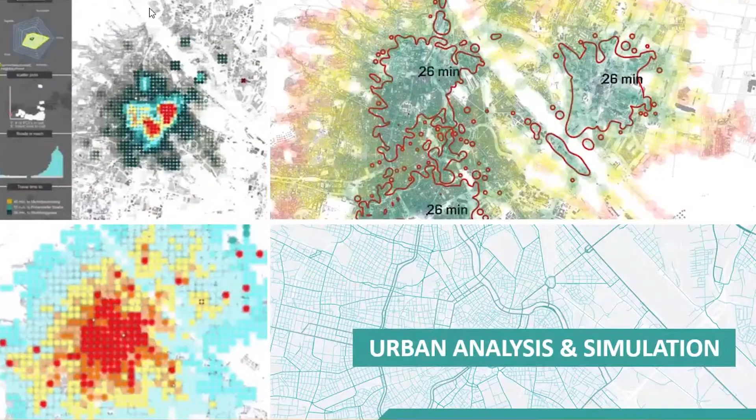Urban transformation and resilience. And that includes, of course, smart cities and energy and resource management and water management and waste management and all of these things, preparing for what's inevitably coming. So climate change and urban resilience and how you react to all that. And going into more of the part that the lab is working on, urban analysis and simulation, a lot of work on how do we analyze cities and simulate conditions and understand cities better. And of course, computational urban planning, so there's a generative side of things.

The lab itself is built as an idea of an interactive interface for the simulation and the modeling and the computational urban planning. So it's got a lot of interactive interfaces and mixed reality and AR, VR components. And this is how it looks when we're pretending to be working on something and people take pictures. This is how the City Intelligence Lab looks. There's augmented reality models and there's interactive screens and stuff like that. This is a little bit how it is.

If you ever come to Austria or Vienna, please feel free to come and visit us. It's great to always have guests and show them around, because actually it's an interesting space. Right now, we don't allow anybody in because everybody is potentially going to kill us. So we don't allow people. But once we get vaccinated, we will be happy to get you.

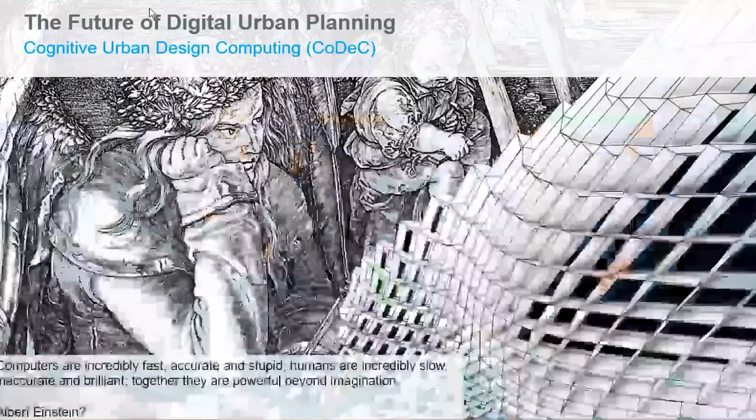Anyway, so a little bit about this project that I was talking about. So the City Intelligence Lab is also very closely related to the Cognitive Urban Design Computing, or CODEC project, which is essentially an internally funded AIT project that funds the research of a few PhDs and a few master's students in order to advance computational urban planning. And most of the work that you see and you will see is part of CODEC. And CODEC is also led by Reinhard König, professor, Bauhaus University in Weimar. So we're together working on the lab and the CODEC project. I'm the deputy on CODEC and the head of the lab. So enough with that, and let's go to the actual interesting stuff.

Who knows what this is from the audience? And please speak up if you do. I hope at least someone knows what this is. Pavlo, I was waiting for you to say something. No? Anyway. "I'm here, man, but I don't know what it is." This is GenerativeComponents. This is GC. The first GC. This is the beautiful GC. "I thought you meant a project." No. GC. Okay, GC, and that was 15 years ago, roughly, right?

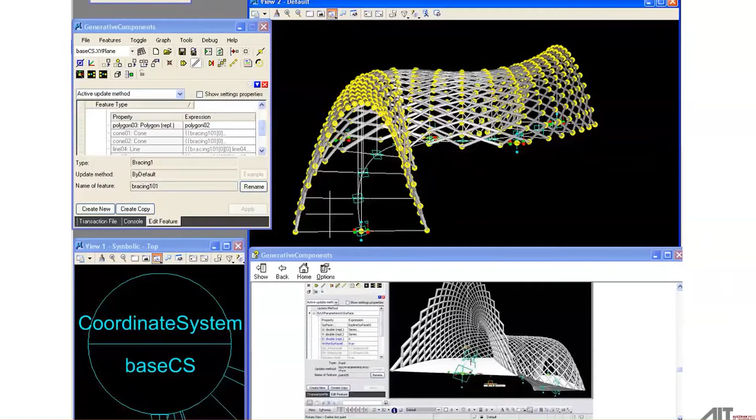And so that was how horrible computational design was 15 years ago. But also, it was a kind of revolution. This is when I started getting involved in computational design. It was essentially learning GC. It was a really weird system that was within MicroStation, and you could just connect things. The same thing that you do essentially with Grasshopper today, but it was very, very crude and crashing all the time. 15 years forward, you have the kind of spaghetti that you probably have cooked very often during this course, which is what we have today, right?

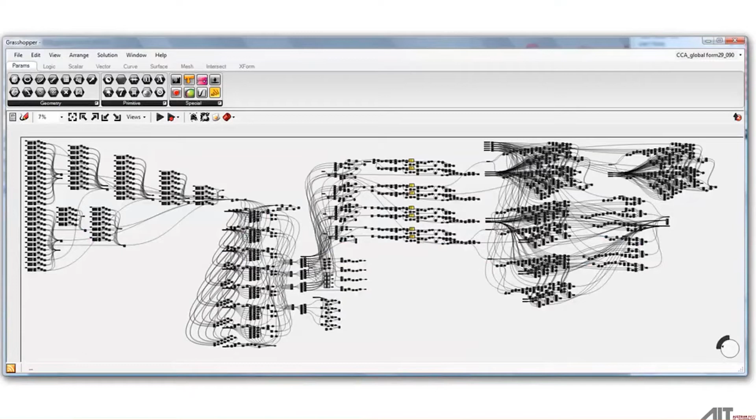So we've gone a really long way in these 15 years. We've actually progressed quite a lot on what we can do with computational design. And this is probably something which is a little bit more niche than that. If we go again 15 years back, let's say we have all this ability to create geometry and generate design, which is parametric or associative or whatever you call it.

But in order to connect that to performance, to actually understand how well these designs perform, this was really, really difficult 15 years ago. This is a connection of GC to Ecotect, which was a very weird connection. You had to download DLLs and run weird things on your computer to get a solar radiation analysis shown on your GC definition. It was not a definition, but it doesn't matter, on your GC geometry, right? And that was like a really big project and breakthrough.

And today, of course, you go into Food4Rhino and you download 20 different plugins, and you can do all sorts of things from FEA analysis to particle spring systems to CFD, right? So we've really progressed in terms of performance feedback in design. We've made huge progress. So when we're talking about urban planning, we can actually have a much more intelligent workflow. We can integrate into the planning process all sorts of different KPIs and performance metrics, whether economic, climate or resources connected, right?

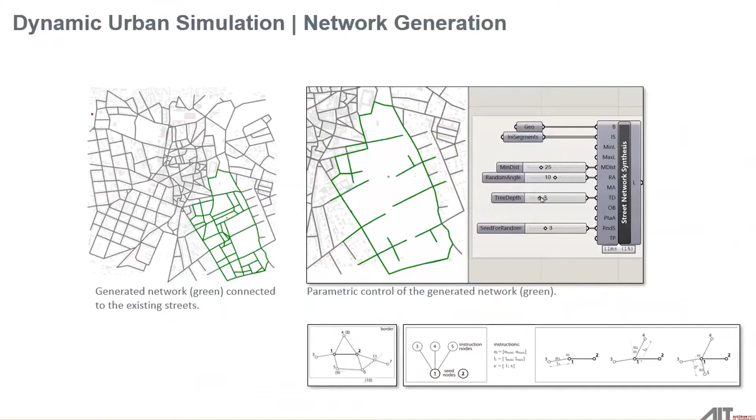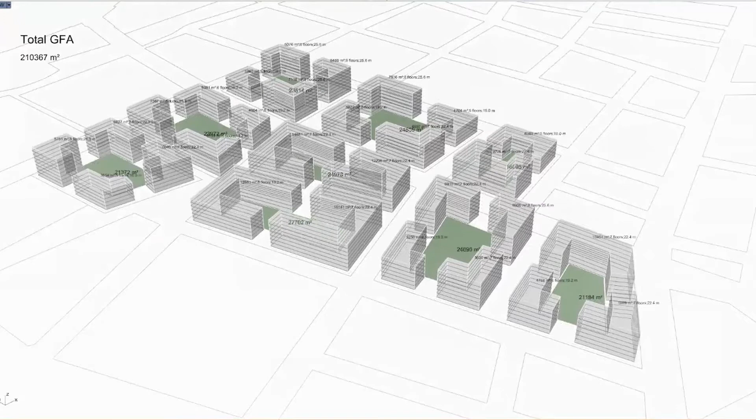It's a very interesting toolbox, and if you don't know it, you can have a look, because it makes space syntax metrics and other similar tools available. So you can find shortest paths, create centrality graphs, or measure the typical spatial metrics of space syntax. You can also generate things like streets. In this case, you see how you can generate a street network from a plot. And you can generate whole typologies and building blocks very quickly. So that gives you the ability not really to design iteratively, but to generate solutions very fast.

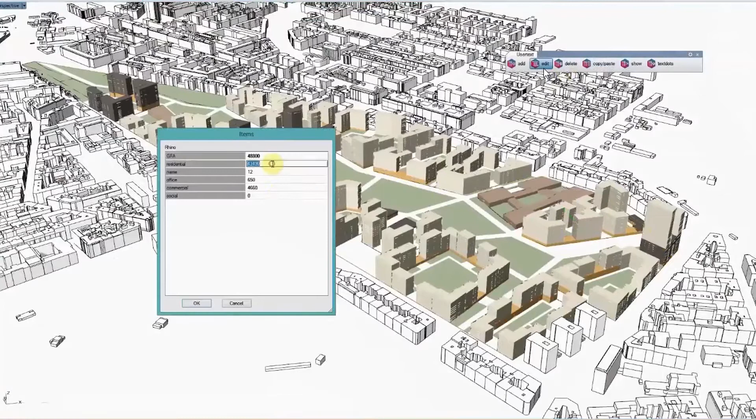I'm sure you have seen things like that before. It's not really that new, of course. For urban planning, this process is relatively new, because it has not been adopted as much as in building design. Here you can see you can build a whole neighborhood, change program and very quickly adapt, and that is already a step up. We're doing more things than that in the lab. I'm just going through several things we're doing, but also giving you an overview of how we can think of the computational urban planning process.

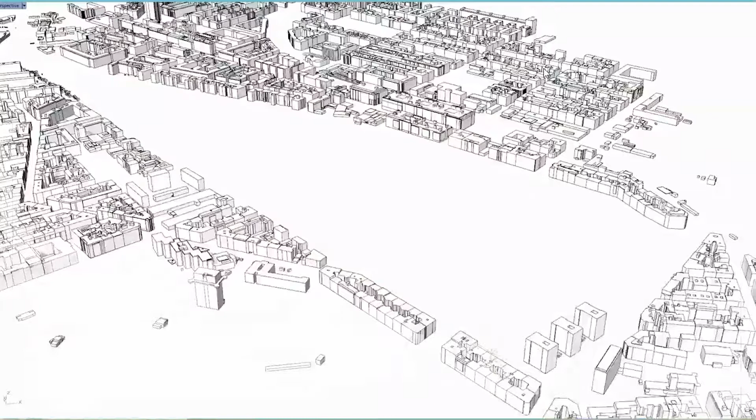Here, if I start from the beginning of the video, we see accessibility in a city: how much of the city is accessible through certain transport modes, so bicycles, buses, trams, and things like that. And you can even design a transportation line or system by adding a few stops, and then see what you can access through that in the city. You can also load existing transportation systems and see how you can affect them by adding new stations or changing station locations.

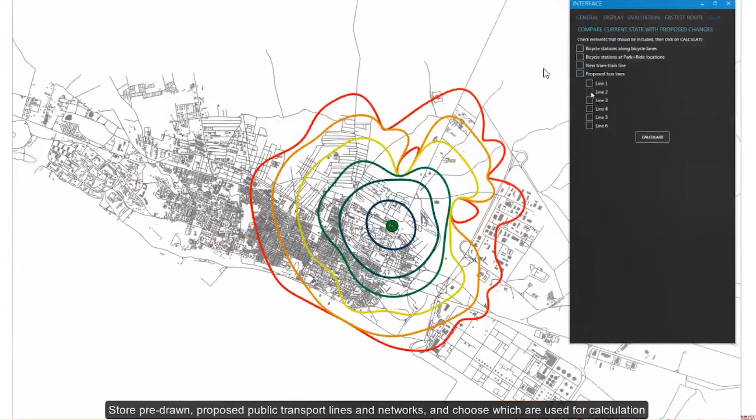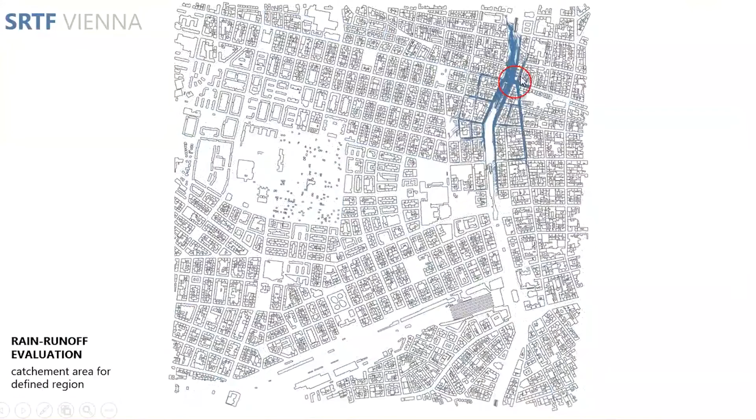Other things we do, as I said, are a lot of climate simulation. This is a rainfall simulation we've produced in the lab. It's essentially a particle system which runs through the digital terrain model of the city, and you can follow the easiest path the water would follow, and identify locations, as you can see here, where you have a concentration of water. Then you can find buildings that have basements and other features that can be dangerous, create a resilience plan for them, and identify places where you need to intervene before a catastrophe happens.

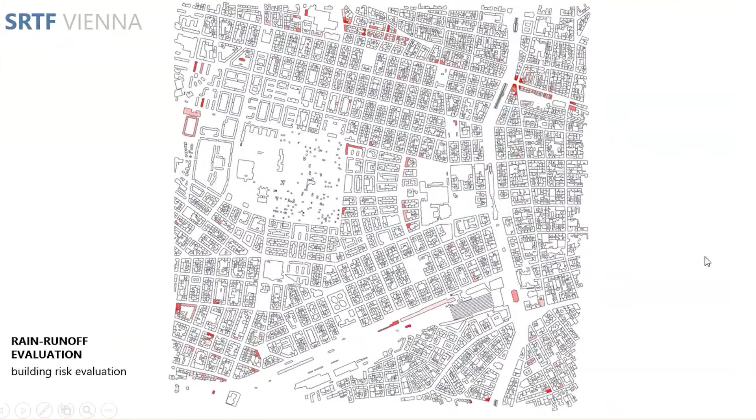But if we go back to this, so this is kind of a quick overview of things that we're doing, just a couple of projects. If we go back to this connection, so yes, today we have all these capabilities. We can connect all these different performance and simulation models, but the truth is that they take a lot of time to run.

So if we take, for example, the typical duration in minutes of a study, a solar radiation study is a very quick one, but a wind CFD study, a wind comfort study, I don't know if you've ever done a CFD study, it's computational fluid dynamics, it can take up to a few hours. It can take 5 hours to run, or an annual wind comfort study, which takes into account the whole year, can take a few days, or same for a thermal comfort study.

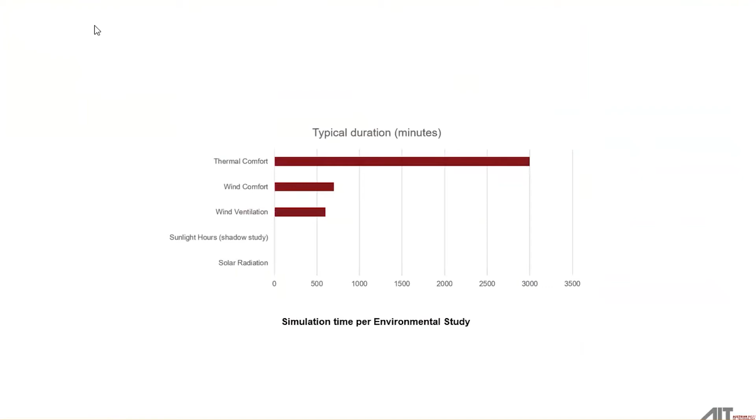So this means that if you were to do this iterative performance feedback loop, where you want to run a few hundred options for a project, not just one, then it takes a serious amount of time. So if you were to do, let's say, 1,000 studies, we're talking about a generative model now, where we run 1,000 different options, then even a solar radiation simulation takes 500 minutes, so it's a lot of time.

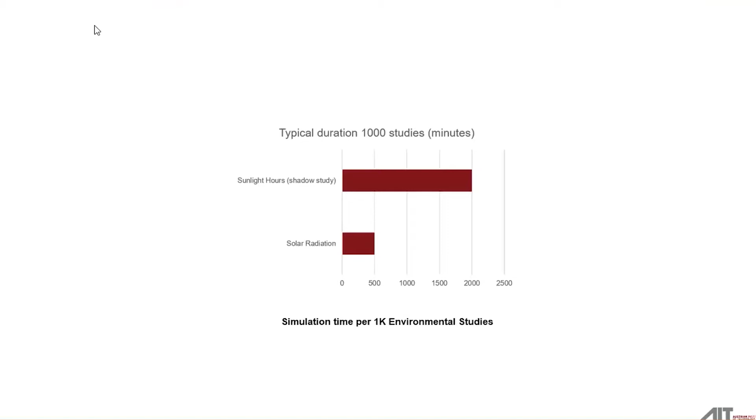So you can imagine that in a CFD project, it's almost impossible to run 1,000 CFDs that take 5 hours each. It's like 5,000 hours. Nobody has this amount of time. So that's where we started, actually, to tackle with InFraRed. And we started with the idea of using machine learning models to essentially speed up or cut that time to near real time. So how can we take simulations and models that would normally consume time to be performed, and use prediction to predict them in almost real time.

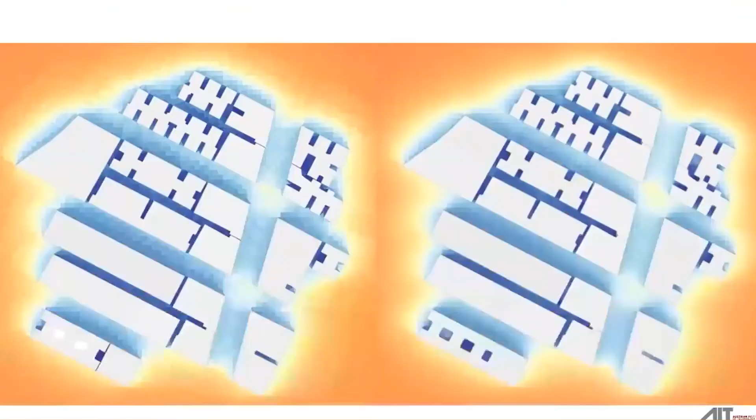So how is that relevant to us? This is, I think, the most powerful image of the project, because it shows two almost identical images, but one of them is a simulation. One of them takes 15 minutes to run, and the other is a prediction, and it's instant. So one takes a few milliseconds to produce, and the other is taking 15 minutes. And this is where we started.

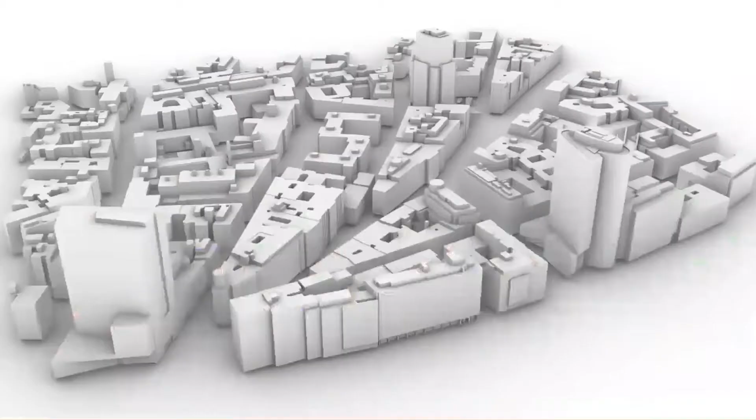How we did that is we took the city. Solar radiation models are specific to each city, so we took the city of Vienna in this case. We took all of the models that we had from the city planning department, and we ran thousands of solar radiation simulations. We took all of these solar radiation simulations and we trained a neural network to predict essentially this kind of result.

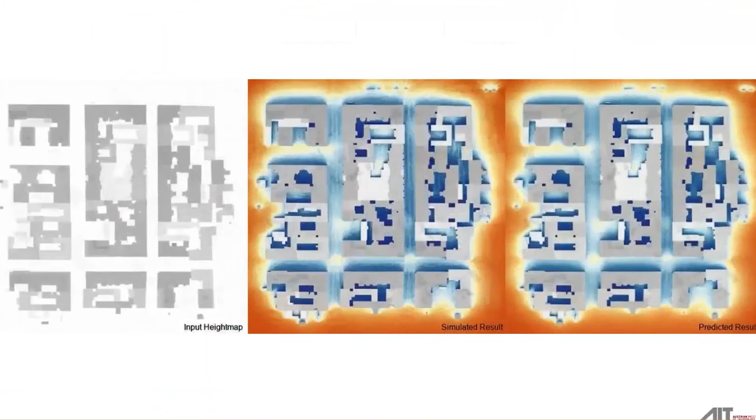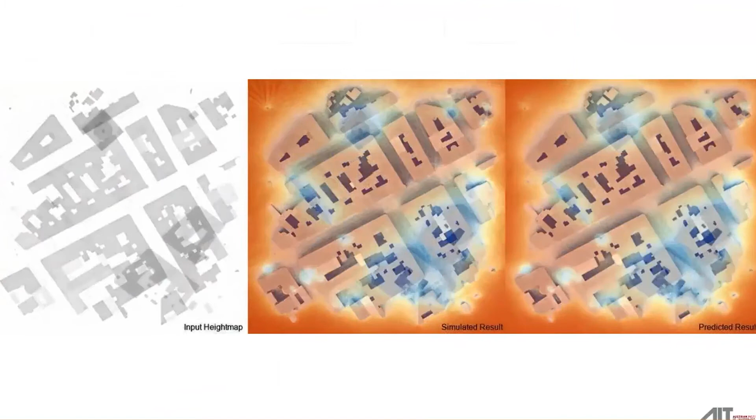Here you see some of those results. You see the input on one side, in the middle you see the simulation, and on the right side you see the prediction. And we were really happy with the result because they're performing really well, especially the solar radiation model. That's why we show it first. It really performs very well, almost 95% accuracy, which is really great if you think of the gain in time consumption.

And this is, again, solar radiation, but in a zoomed-in version. It works in different scales. That's what we're trying to show here. But solar radiation, let's say, takes 15 minutes, something you can actually do today very quickly. You can hook a Ladybug tools component, and you do it in almost no time.

A CFD simulation is a much more complex and very, very time-consuming simulation to run. Each one of these little tiles usually takes 4 or 5 hours to produce. So you can imagine running 5,000 hours of simulation is a really complex task. We did it using the AIT infrastructure. There's a cluster, and we ran 20 virtual machines that were running for a week, all of the simulations.

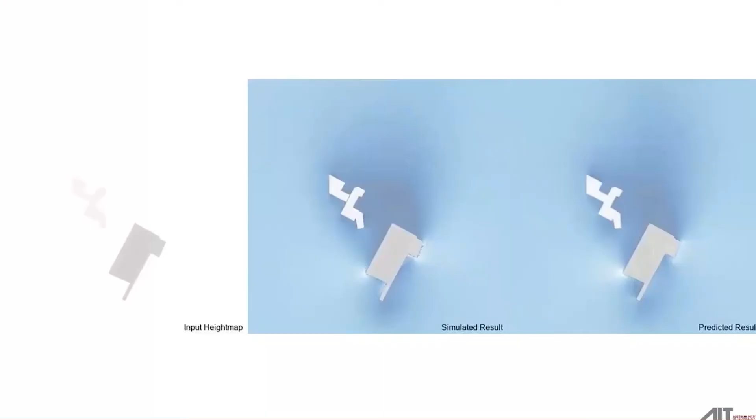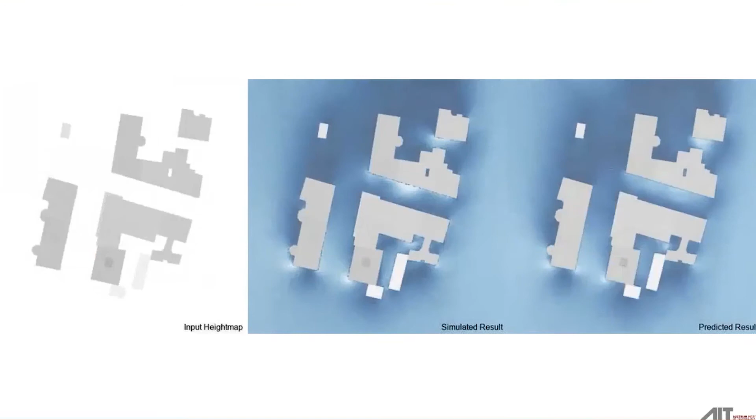And at the end, we produced the results, and we trained the same machine learning model, and we were really happy with this result because it's really a breakthrough for us. We hadn't been able to get instant, because again the time you need to predict this is milliseconds. So we got instant CFD simulation, which was a breakthrough. It was generally very well received, and you can see again how well it performs. So what do we do with that?

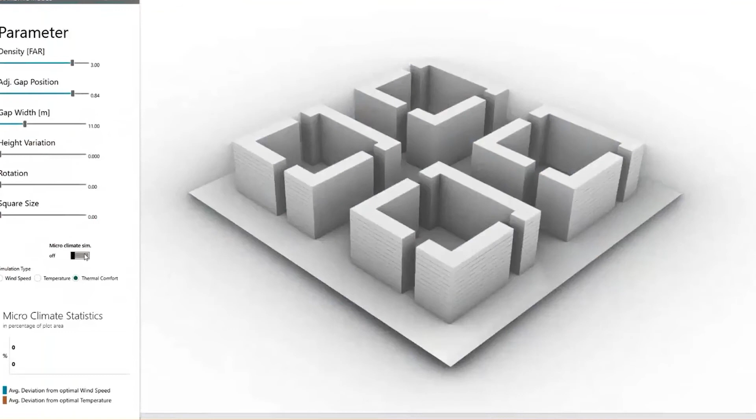We started with a simple parametric model, and we can change parameters from here and there, and we can change the gaps between buildings or street orientations or things like that. And you can immediately get microclimate statistics for this example, right? You see here, I changed the center plot, and I get an immediate prediction on how much percentage of my urban area is within certain thresholds.

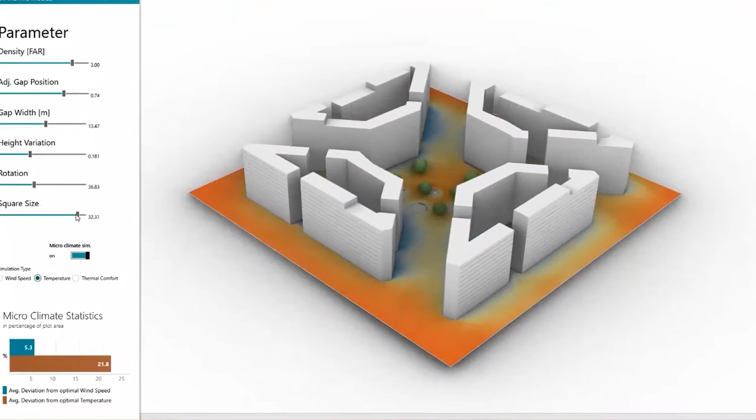For example, the optimal wind speed or the optimal temperature of this area, which is very promising because you can actually design, and you immediately know the effect of your massing on the thermal performance of the quarter. Of course, we didn't stop there because it was really interesting. We went into other dimensions of performance, which are related to, as I said, accessibility of transportation or walkability or noise, which was also very important, or other things.

We're not going to go into everything here. I just want to show you how this project evolved. So we started as a little bit of a research project. Let's do machine learning to predict, and then let's do a parametric model, and then we actually did a whole, let's say, framework. That's where InFraRed started being born.

I hope the sound doesn't go through because it's a typical funny sound for promotion videos.

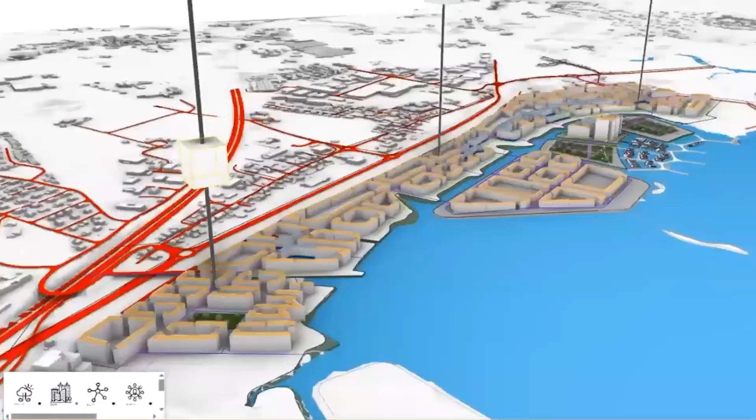And here you see a little bit of an overview. I'm going to go into detail of how InFraRed as a framework works. I'm going to go through it in more detail from here. You can see in a project, for example, this is a waterfront redevelopment in Sweden that we worked on a little bit, to pitch a project there with Link Architecture, a company that works in Sweden.

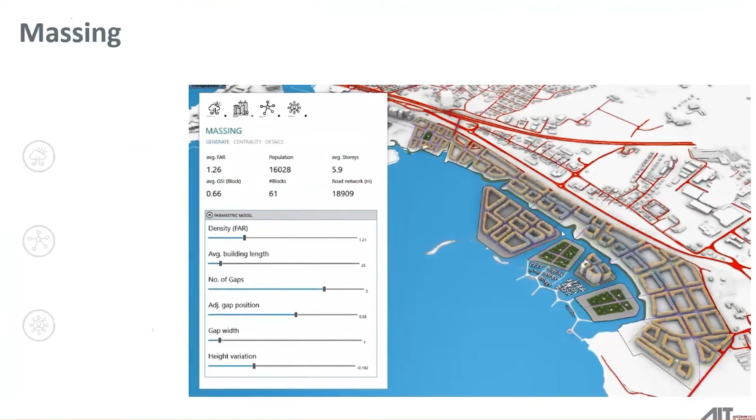So we put together all the things that we were doing in InFraRed at that time. That was about 6 months ago, and we did a little project. So here's the massing part. Again, using all the generative aspects of our tools to produce geometry very quickly. So changing the streets immediately changes the massing, and then you can have these attractor points, and you can add or remove density.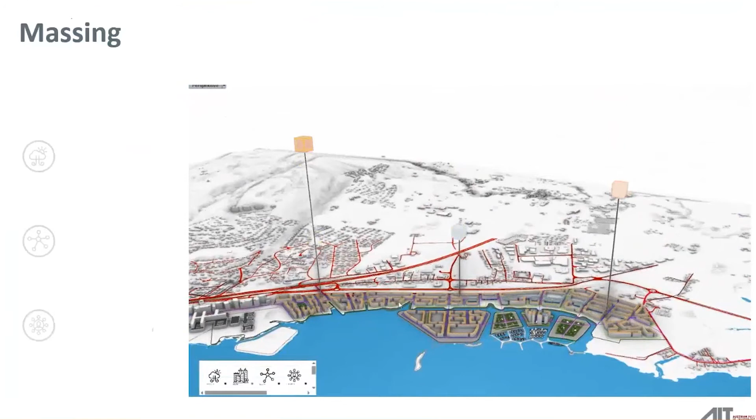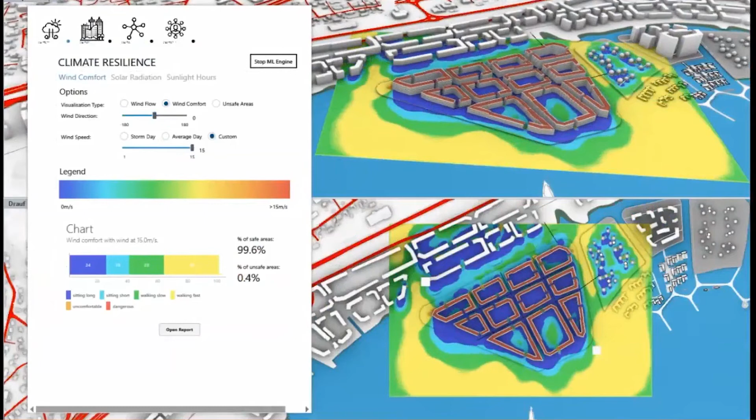Not very interesting stuff, but this is more like the thing that we were saying. Here's where you have a module where you can see the wind performance, and you can see how different days of the year, different wind speeds, how well they perform, and you can do it very quickly because you can change the parameters and immediately see the result. You don't need to run the simulations anymore.

You see the results immediately in real time, and that means that you can actually start, as I was showing before, playing with design components. For example, you put a park somewhere, and you can see how the wind goes through very quickly, and you understand what happens if I put the park on this plot or on this plot.

How much of the area that I'm generating is comfortable, because there's a lot of wind in Sweden and the waterfront, of course. And you can see if I can block, let's say, certain streets by buildings, how much do I make this better, etc. Or if I, let's say, knock off a few buildings, or if I add towers or things like that.

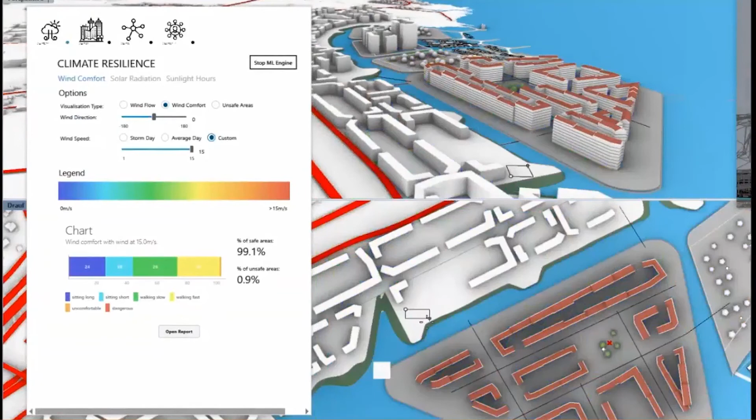All of these things were impossible to do without the machine learning, because for every iteration you need to run a 5-hour CFD simulation, which is really not feasible at all. So it really changes the way you're designing, and it changes also the cognitive ability of the designer itself, because the more you see that, the more you will understand what a tower does to a plot.

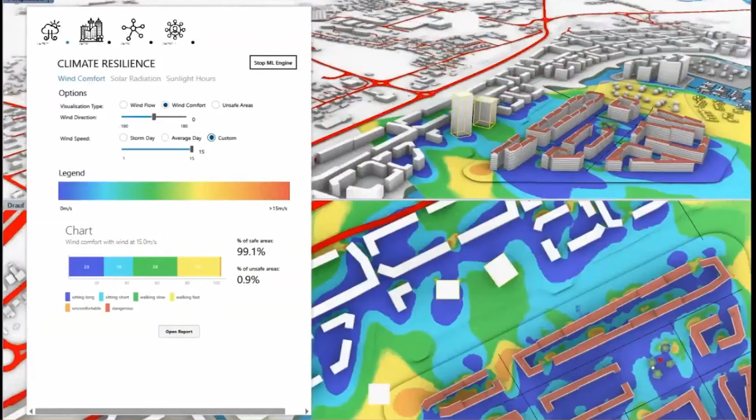So when you do it enough times, you will, as an architect, as a designer, also develop a certain cognitive capacity to be able to design with the wind as a component. And that's, I think, the most interesting part. Of course, as I said, we didn't only use wind simulations. Maybe that's the most impressive part, but of course we used a lot of space syntax measures.

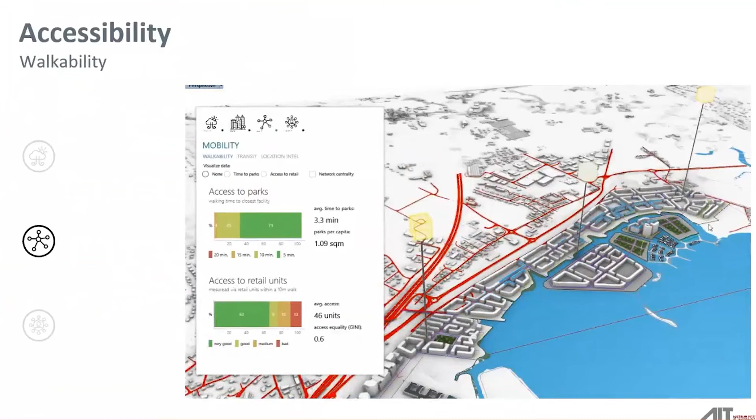This is calculating accessibility to parks or to retail in the same model, it's all integrated. I'm going to go through them a little bit faster because it's a little boring. It gives the designer the ability to have an overview, to understand every design decision, what it does to all of the other performance aspects.

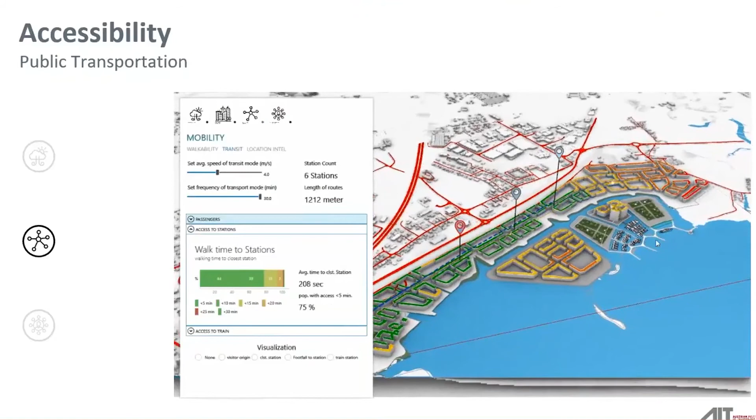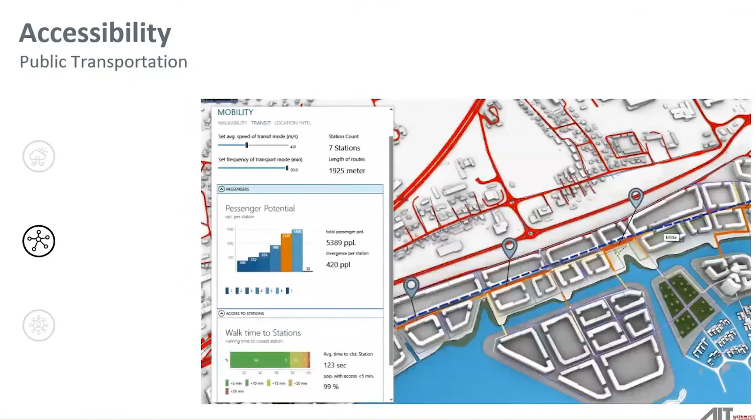So in this case, for example, designing a bus line that goes through the quarter, through the neighborhood, and then see how much the walking time to stations changes. Similarly here, you can see the potential of passengers, and of course noise and other things. You see how much of your population is exposed to noise pollution, etc.

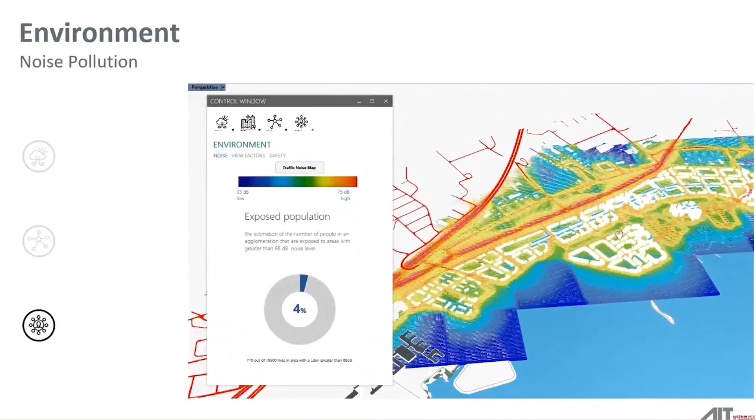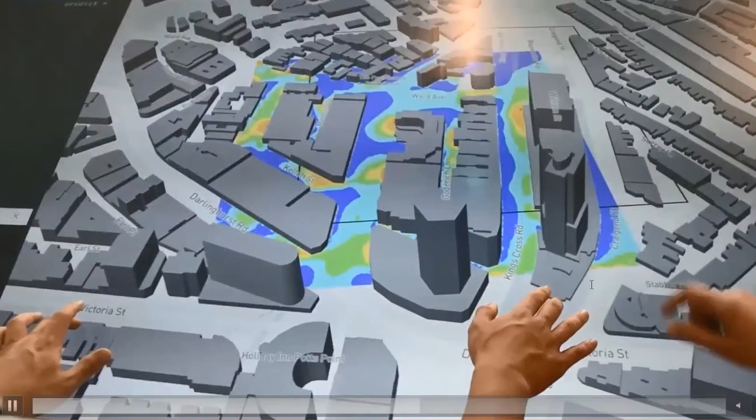And then of course we implemented all of that within the lab's interfaces, and that's a little bit of a promo video. The other thing: when we actually started presenting this to the world, we got a lot of interest from different parties. And in this case, we got Giraffe.

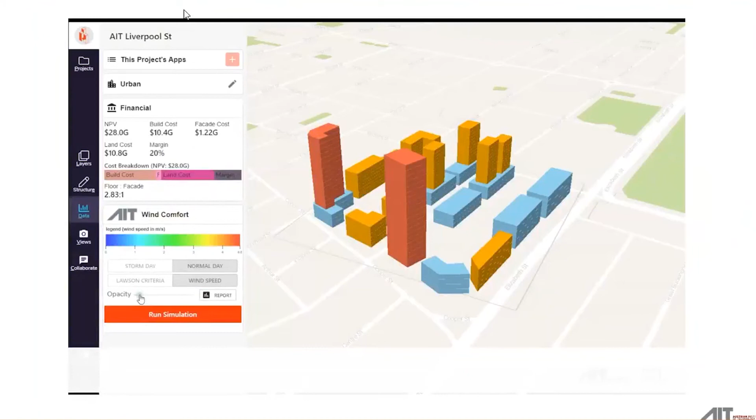I don't know if you've heard of Giraffe. It's an online platform for design. So you can actually use it as an online design tool, so to say. And we were asked to integrate the wind comfort model there.

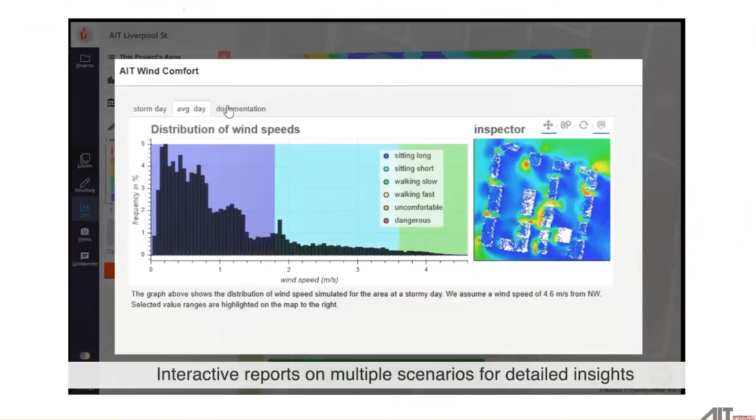So that's exactly what we've done here. We changed the interface a little bit, and we also added a few features. So here you can see, for example, the Lawson's criteria, which means how much percentage of your area is good for sitting, good for standing, whatever. You can actually select specific wind speeds and see them on your design area, and see where they occur, and some other more informative things.

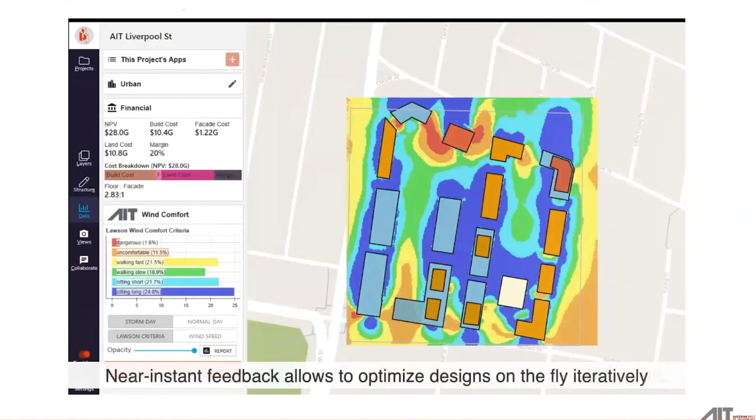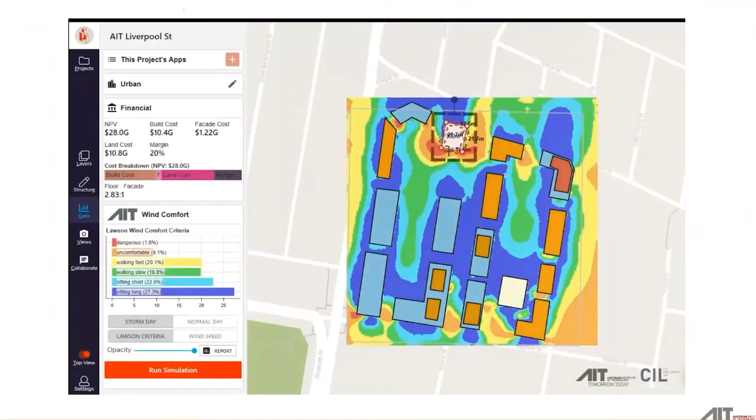And again, the idea is that you can actually interactively design with the wind. You can rotate buildings or block certain areas, and again, you get a metric of how well you're performing, which was also quite well received.

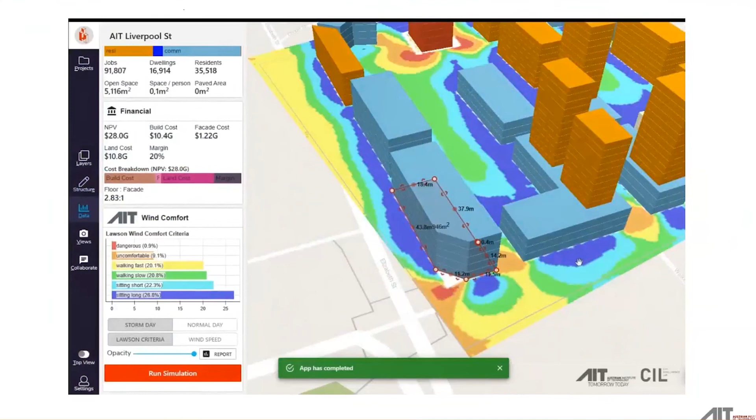If you want to use InFraRed at some point, let me know, because we can get students a free license to Giraffe, or a reduced license. I'm not sure exactly how they're doing that, because it's a paid service. But we're also planning to release InFraRed soon as an online design tool. But this is hot off the press, not really there yet.

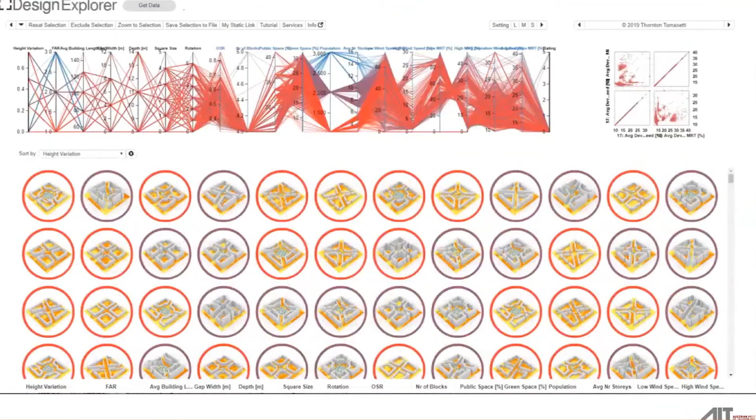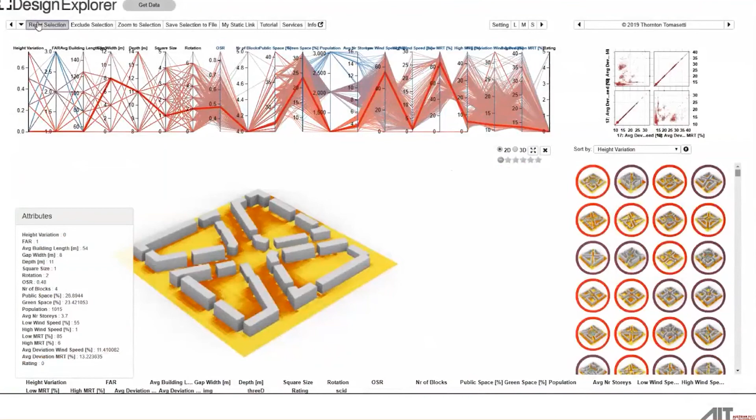So then if we go one step further, we can do all of this interactive design with wind and solar radiation, all of these models. But it also means that instead of running these iterative and interactive models, we can also run 1,000 different iterations. I'm sure you've seen Design Explorer before. You put them in Design Explorer, and you can actually start exploring your design space without explicitly designing, but just selecting certain parameters that you're interested in, or certain performance metrics.

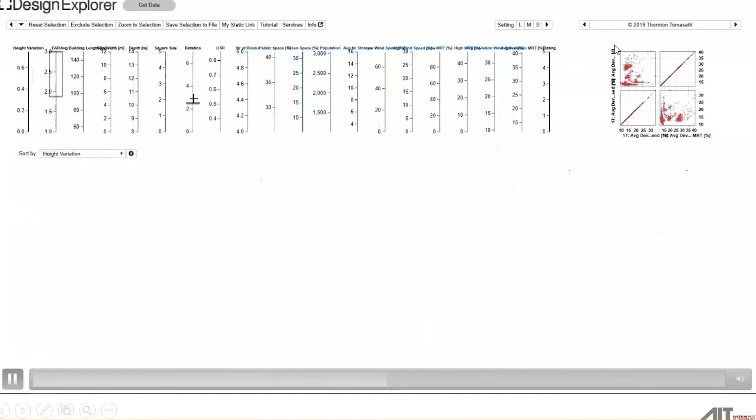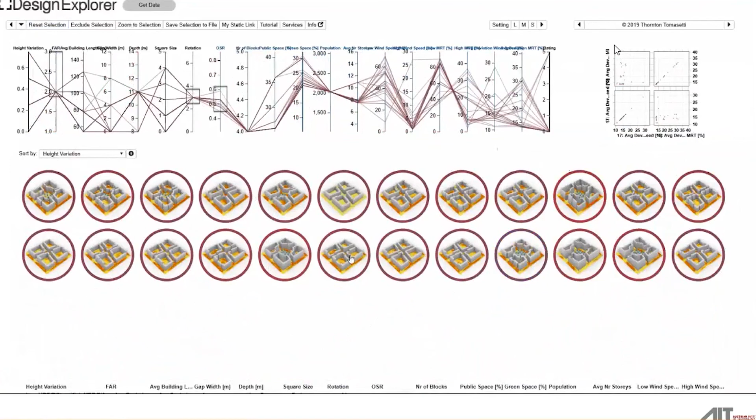So in this case, you're selecting a certain amount of FAR and rotation, and then you see what part of my design space satisfies certain performance criteria, like OSR, or spatial metrics, but also wind speeds and things like that. And you can rate solutions, you can share the same design space exploration with other people, etc. You can't really do that without a machine learning backend, because it is impossible to run 1,000 CFD simulations for a project.

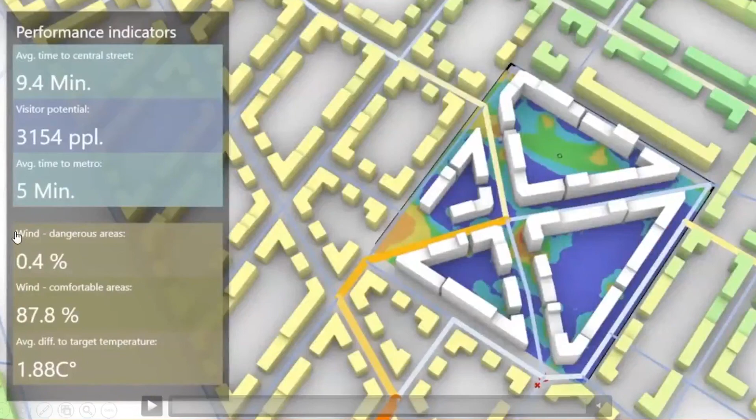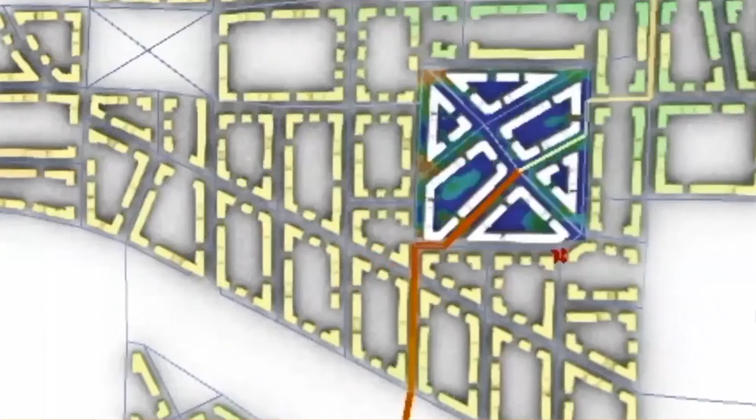Same thing we're doing here. This was a paper we presented at the SimAUD conference, Simulation for Architecture and Urban Design, in 2020, which was again taking a quarter and running thousands of different options or iterations, and then analyzing them and optimizing certain parameters. And of course, the idea is that you don't want to take away the control from the designer. So you can start with an optimization process and continue manually in an AR environment. That's a little bit showing all the capabilities of the lab in one video.

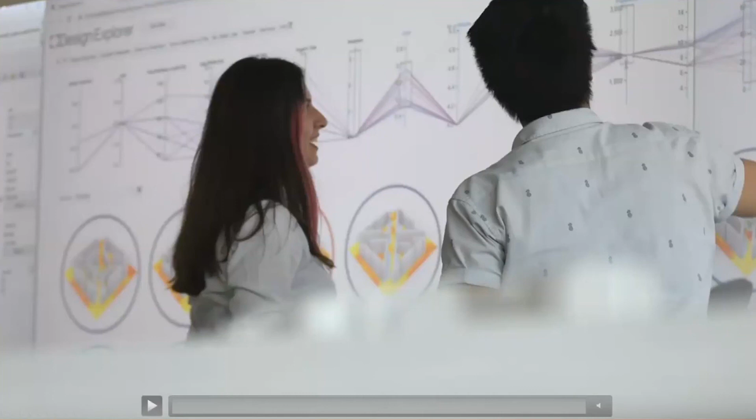And of course, the performance-driven design aspect is our main focus, but bringing that all into a natural planning process is also important, because especially for urban planners, it's not really common to work over a screen and a Design Explorer sort of statistical model. It's better if you work on a physical model. And so we've done a lot of AR, HoloLens, iPad, all sorts of other stuff.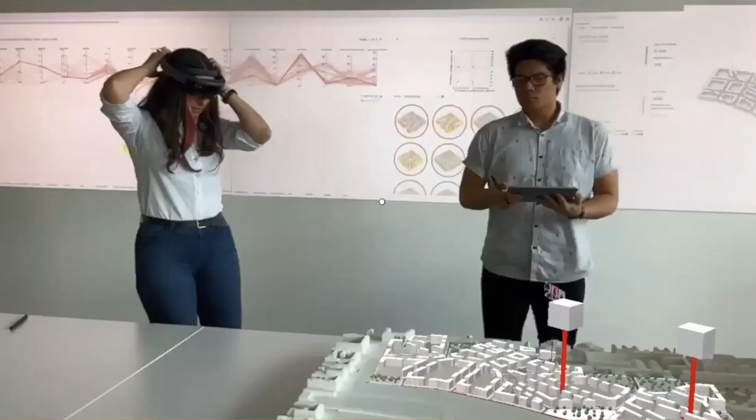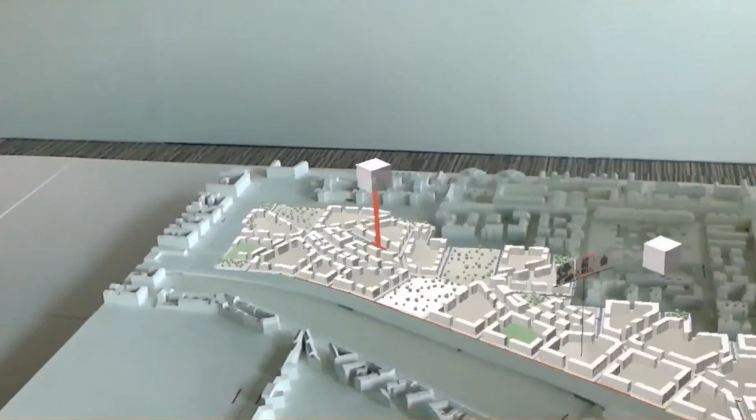Here you see the lab again in its full capacity, and you see how we have designed interfaces so that people can actually work with the physical model in real time and in real space, and design the urban plan together, collaboratively and also intelligently.